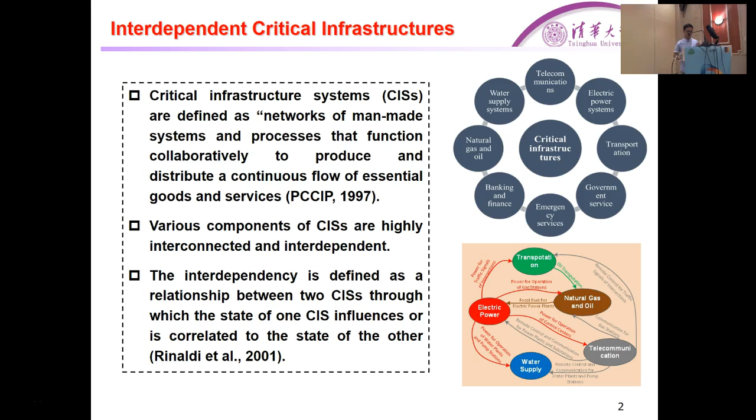These interdependencies bring not only efficiency but also risks. Here is the process of a city responding to hazard events. Interdependencies can aggravate the disturbance propagations and also can decelerate the system recovery. For example, in the 2008 Chinese winter storm, the failure of electrical power facilities led to the breakdown of communication and heating systems. And the failure of transportation facilities led to more difficulty in the emergency restorations and also made fuel inaccessible to power plants, which resulted in the electrical power shortage.

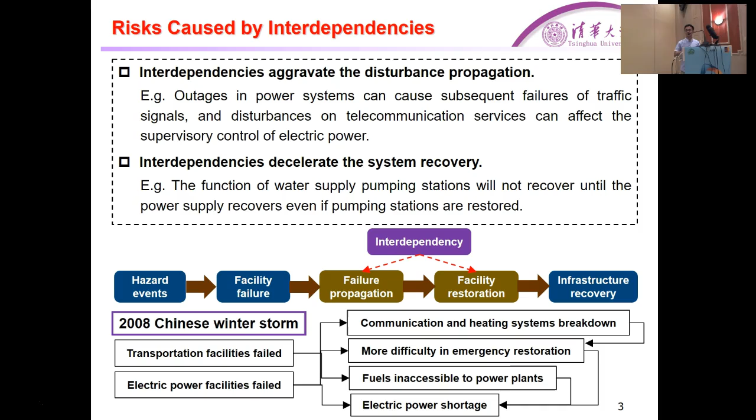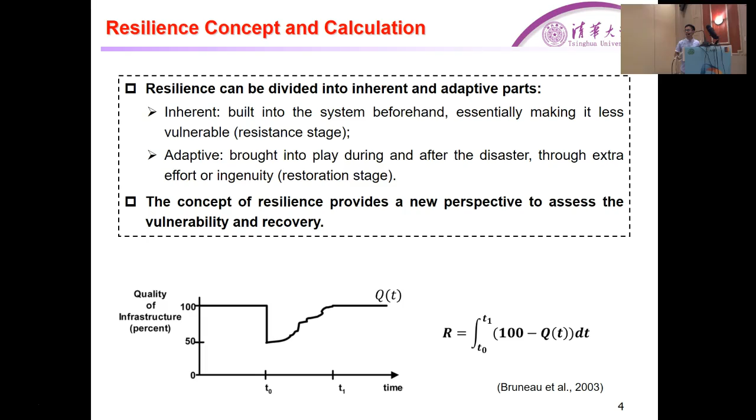So it's urgent to measure the city performance level during the whole process, since the concept of resilience was proposed. Resilience can generally be divided into two parts: inherent and adaptive. Inherent means making the system less vulnerable in the resistance stage, and adaptive means taking extra effort to make the system recovery more efficient and faster. This concept of resilience provides a new perspective to assess both vulnerability and recovery.

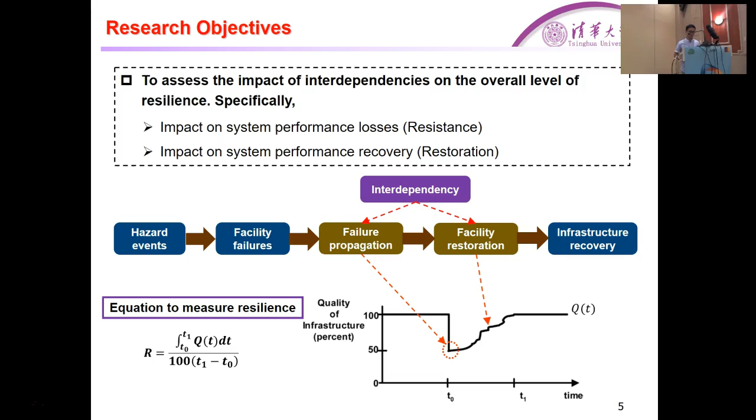So my research objective is to assess the impact of interdependencies on the overall level of resilience. To be specific, it can be divided into two parts. One is the impact on system performance losses, and the second is the impact on system performance recovery in the restoration stage. So we adopt simulation-based methods by using various existing and typical models. And 10 simulation settings were conducted with different modeling approaches and resilience metrics. One setting means a group of one modeling approach and one resilience metric. The purpose of these simulation settings was to ensure that simulation results were independent of modeling approaches and metrics.

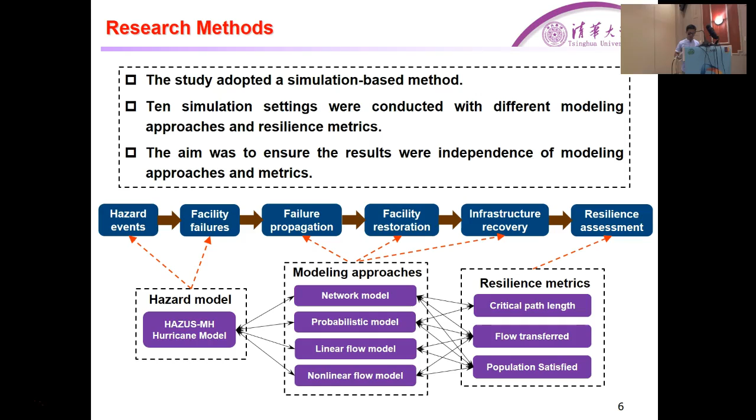And we adopted a hurricane model to simulate the hazard events. Parameters including altitude, land use, and structural strength were used to determine the probability curve of CIS. And a 12-grade typhoon was selected in the case study based on the historical hazard analysis. The simulation result of this hurricane model is the failure probability of each facility. So in this case study, it was assumed that CIS facilities whose probability of failure exceeded 50% were regarded as failed.

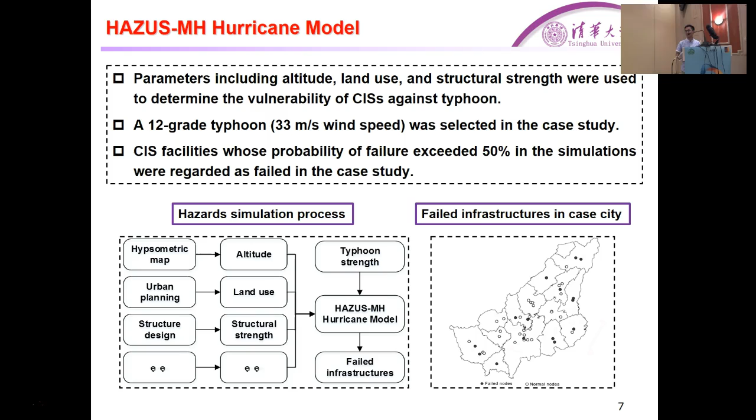And then we adopt 4 typical network-based models to simulate the interdependencies, where nodes represent built facilities and links represent connections. So in the first simple network model, when there is a connection from node A to node B, if A fails, then B fails. In the second probability model, if A fails, node B doesn't always fail; it has a possibility to fail. And in the flow model, each node and link has 2 properties. One is the flow, the second one is the capacity. Flow means the current amount of goods the link or node delivers, and capacity means the maximum potential flow. So the flow cannot exceed the capacity.

So if nodes A, B, C are in the same CIS and A fails, the flow of node B will decrease linearly. But if B is in a different CIS from nodes A and C, the capacity of node B will decrease. In the nonlinear flow model, if the flow of A decreases to a certain extent, it will satisfy the demand of node B first, which means the capacity of B will stay at a certain extent, such as 50% in the case study.

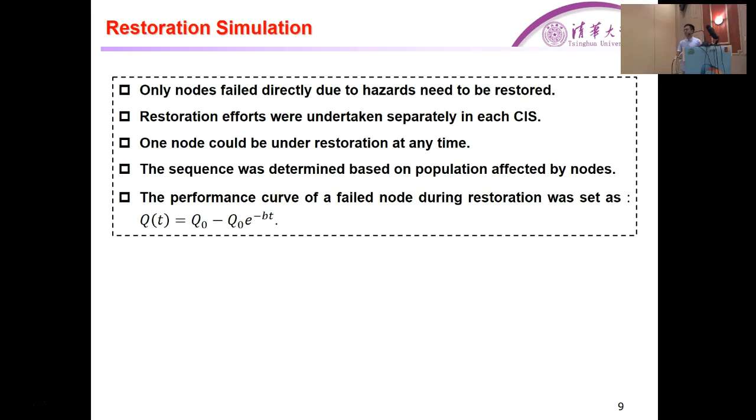And we finally adopt 3 resilience metrics to assess the resilience. The first one is the critical path length, which means the average shortest path length between all pairs of nodes. Flow transferred means the current flow transferred in the CIS. And population satisfied means how many people were satisfied at the current time.

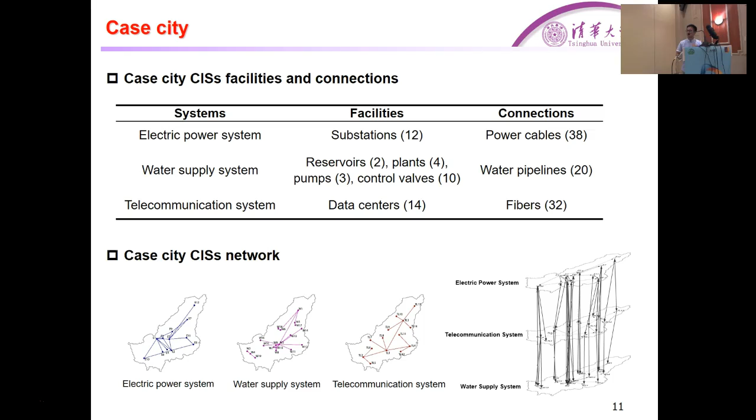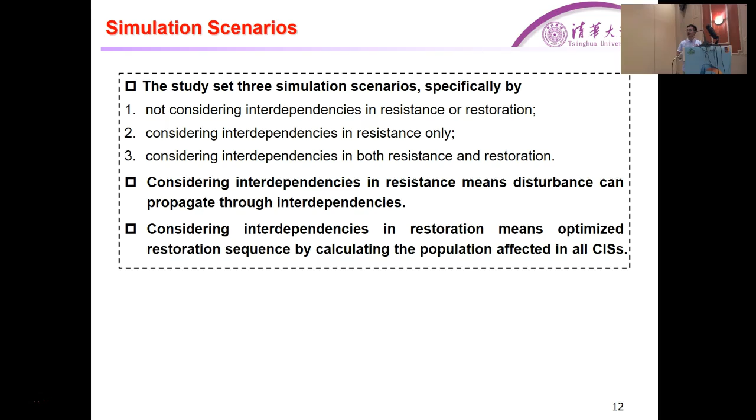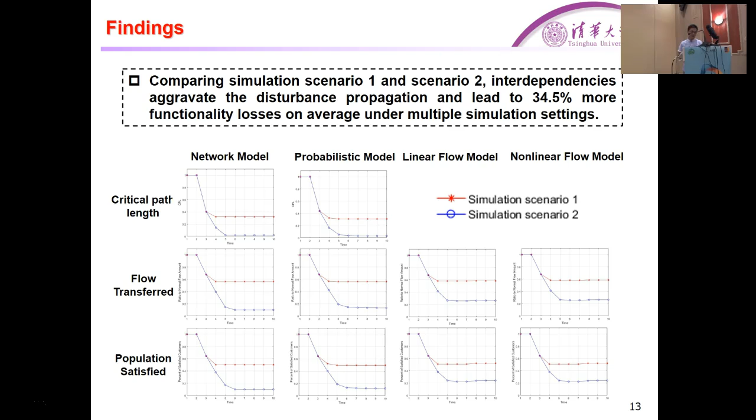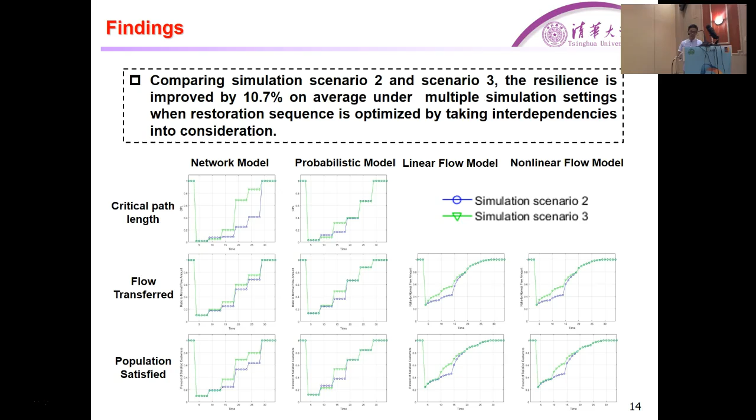So here are the simulation results. This is the resistance stage, comparing simulation scenarios 1 and 2. We can find that interdependencies aggravate the disturbance propagation and lead to more system performance losses in all 10 simulation settings. And this is the restoration stage, comparing simulation scenarios 2 and 3. You can find the recovery and the resilience are improved when the restoration sequence is optimized by taking interdependency into consideration, also in all 10 simulation settings.

So as conclusions, in this study we simulated both resistance and restoration stages of CIS response to a certain hazard event using 4 network-based models and assessed the resilience of CIS using 3 metrics. And the results in all 10 simulation settings showed that the interdependencies had a significant impact on the performance and resilience of CIS. The approach described in the study is applicable to CIS which are well networked and whose faults can be measured and recorded. And as future work, we are going to propose a resilience investment optimization framework based on the simulation process presented in this study.